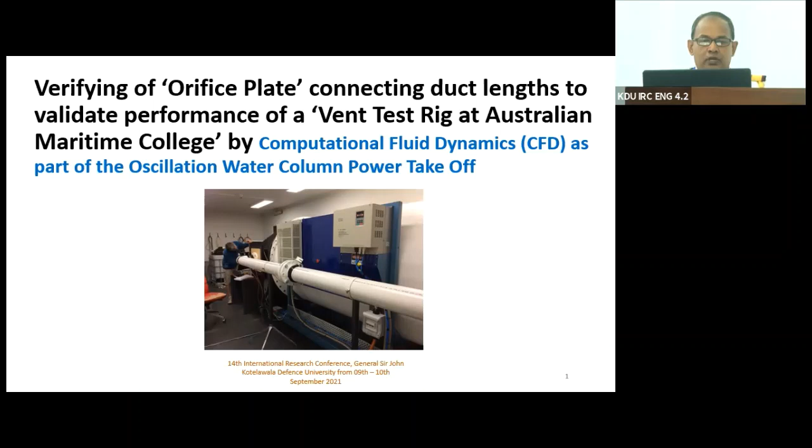Good morning, ladies and gentlemen. Today I am going to discuss verifying of orifice plate connecting duct lengths to validate performance of a vent test rig at Australian Maritime College by computational fluid dynamics, as part of oscillating water column power takeoff.

My outline is as follows: how oscillating water column ocean wave energy converter works, vent test rig, experimental recommendation, alternative method, geometry of pipe, generate a mesh and boundary condition, comparison of experimental results with computational fluid dynamic results, and conclusion.

Oscillating water column ocean wave energy converter consists of 2 major components. First part is chamber that absorbs energy from ocean waves and converts them into low pressure pneumatic power. Second element is turbine that runs by above developed pressure variation and drives a generator through a mechanical shaft and generates electricity. In this process, turbine is exposed to unidirectional airflow and utilizes a one-way valve to escape air from the chamber.

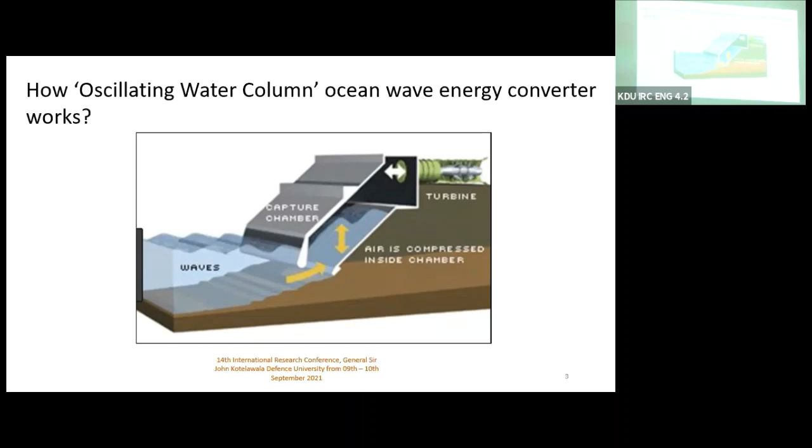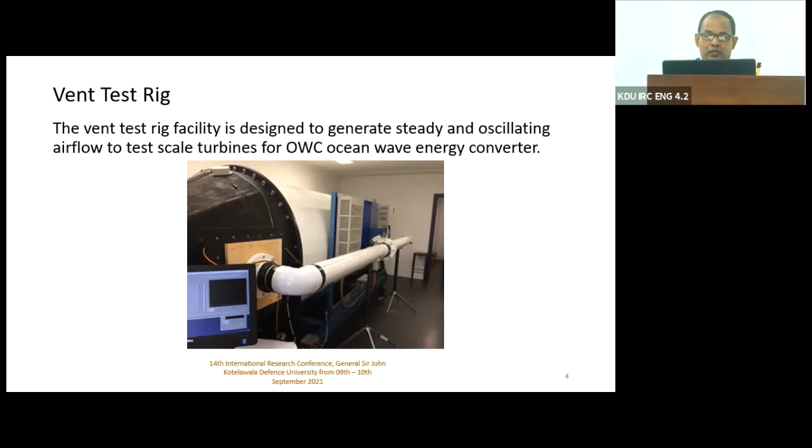Experimental recommendation. Expected outcomes could not be achieved by the experiments due to space restriction of the room.

Alternative method. Chose computational fluid dynamics application as alternative method to continue the investigation with economy of effort.

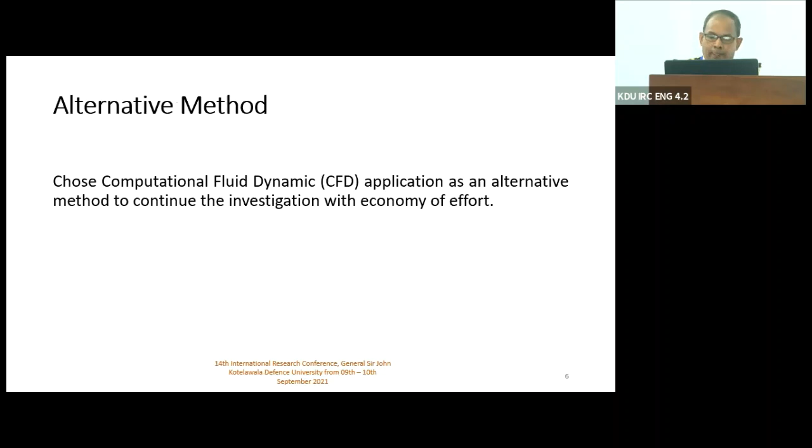My aim. The objective of this investigation was to apply CFD instead of vent test rig experiment and carry out modeling, then compare outcomes with experimental results.

Condition 1: CFD application was used to test differential pressure across the orifice plate with same upstream and downstream length of pipe that was utilized during the vent test rig experiment. In addition, CFD was applied again for the specified lengths of pipe with same orifice plate to measure the differential pressure across it - that is condition 2.

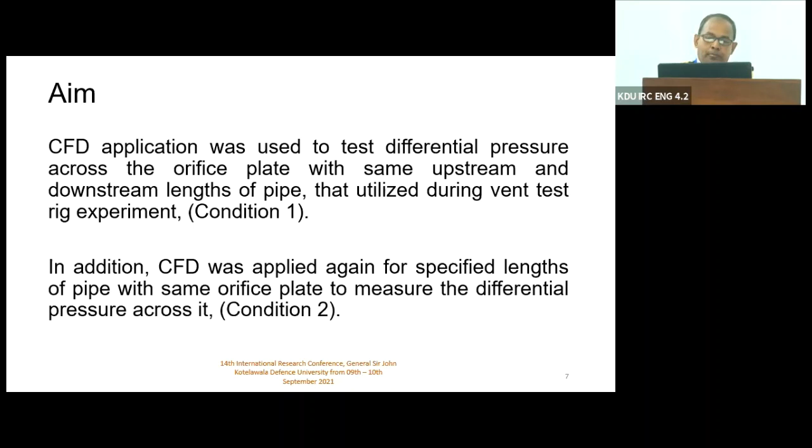This is the geometry of the short pipe. This is condition 1. The upstream and downstream pipe lengths were taken as 1675 mm and 1800 mm respectively.

This is the long pipe. This is condition 2. Upstream length increased up to 3000 millimeter and downstream pipe length kept as 1200 millimeter as per the standards.

The 3D geometry of two pipes and orifice was generated by Inventor software and exported into the ANSYS 19.1 workbench software. Subsequently, a fixed diameter orifice was made and selected XYZ coordinates correctly. Then develop upstream duct length up to 1.675 meter and downstream duct length with 1.8 meter as condition 1.

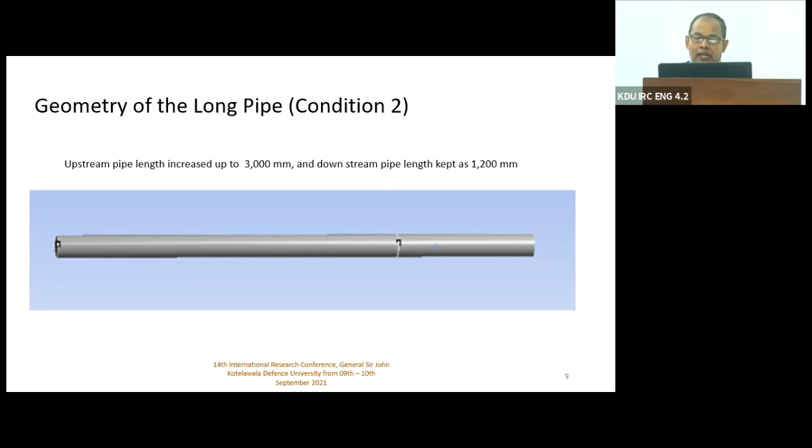Then simplify the geometry by introducing the inlet, outlet, walls, orifice inlet, orifice outlet to the ducts and orifice. Similarly, upstream duct length was extended up to 3 meter and downstream duct length was shortened to 1.2 meter as per the standards. Consider this as condition 2.

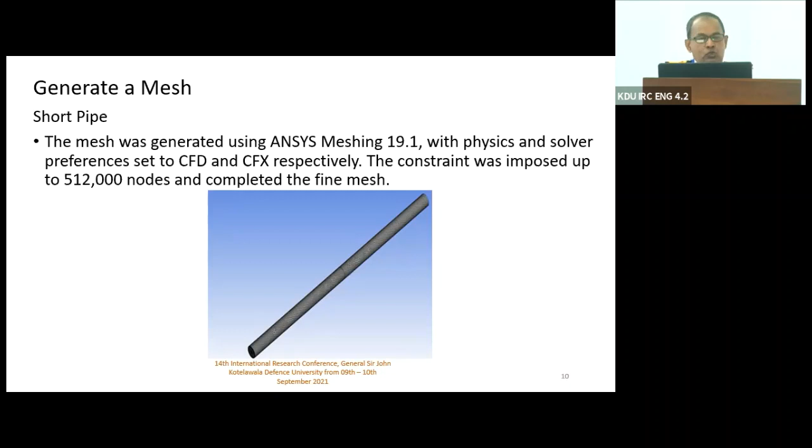Generate a mesh. Then after that we generate the mesh through ANSYS 19.1. This is the short pipe, and this is the long pipe. The process of meshing is time consuming and complex to generate an accurate mesh. The mesh is essential to be quality to give accurate answers. The movement of flow is bit complex in this application.

The mesh files were imported into CFX presolver and conduct the analytical study. Then define the properties of air and boundary conditions. Two monitoring points are established with 0.15 distance from the orifice plate inside the upstream of the pipe as per specified standards. Similarly, two more monitoring points were set up with 0.75 meter distance from the orifice plate inside the downstream of the pipe to obtain relevant measurements of the pressures.

The mass flow rate was calculated as per piston moving velocity and fed as input to the application to obtain the related pressure by monitor points.

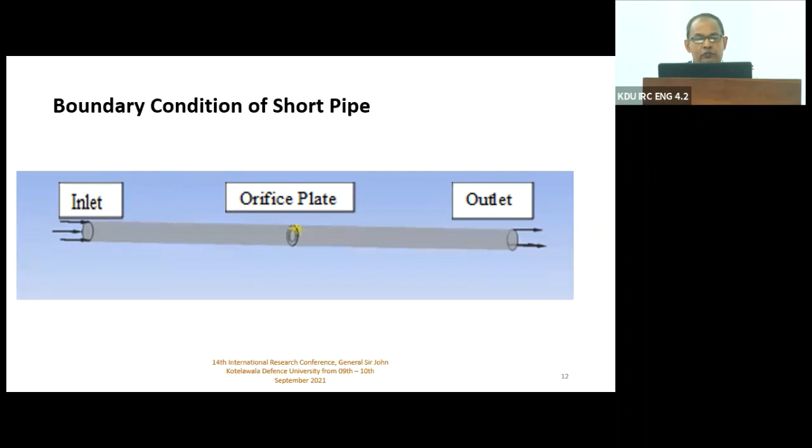This is the boundary condition of short pipe. You can see here inlet, orifice plate and outlet. Close to the orifice plate, there are 2 points - those are the monitoring points.

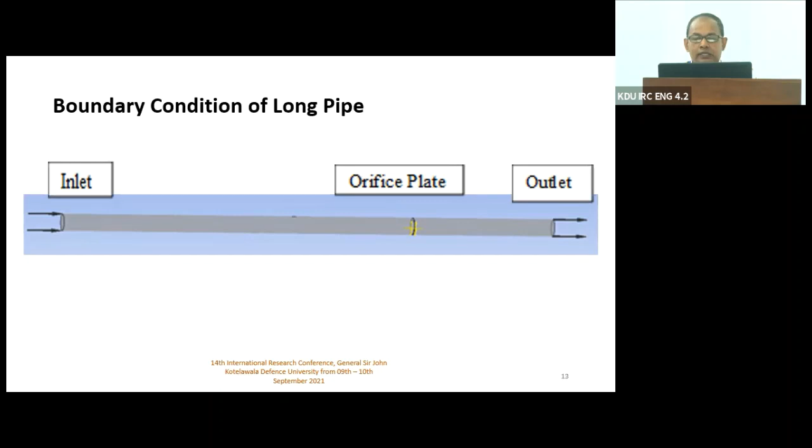Boundary condition of long pipe. The inlet and outlet domains were modeled with air in 3 different velocities. The inlet and outlet pressures were monitored through the monitoring points and carried out the simulation, then ensured to get the convergence in inlet pressure variations along with velocities.

This is called the convergence study of the short pipe. There is another name for this - that is the study to prove the boundary conditions of the generated mesh.

The inlet pressure converged with an estimated error of 0.0352, 0.21 and 0.175 for the coarse, medium and fine mesh respectively.

Grid convergence study, inlet pressure. This is the graph we obtained during the CFD modeling, for the short pipe.

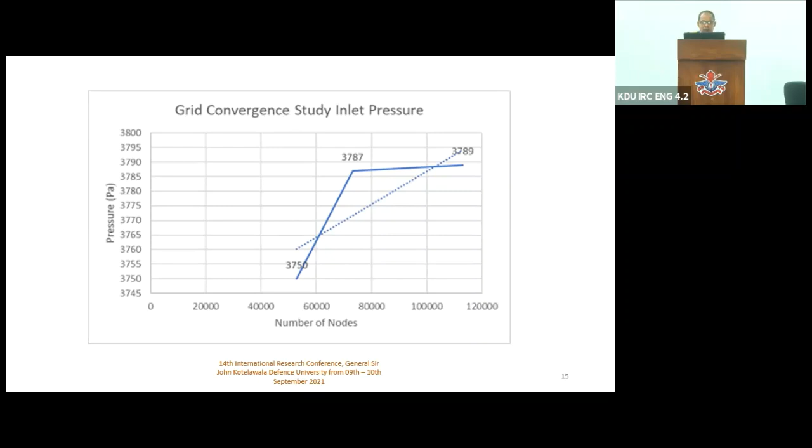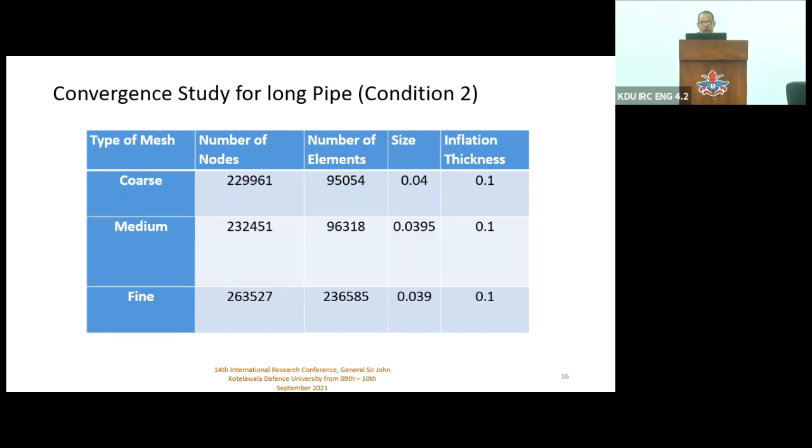Convergence study for the long pipe, condition 2. You can read this table in 5 columns, similar to the previous slide, showing types of mesh: coarse, medium and fine. The inlet pressure converged with an estimated error of 0.04, 0.0395 and 0.039 for the coarse, medium and fine mesh respectively at a velocity of 0.25 meter per second for a long pipe. It was revealed that the fine mesh provided the minimum error compared to the others. This is the grid convergence study, inlet pressure long pipe.

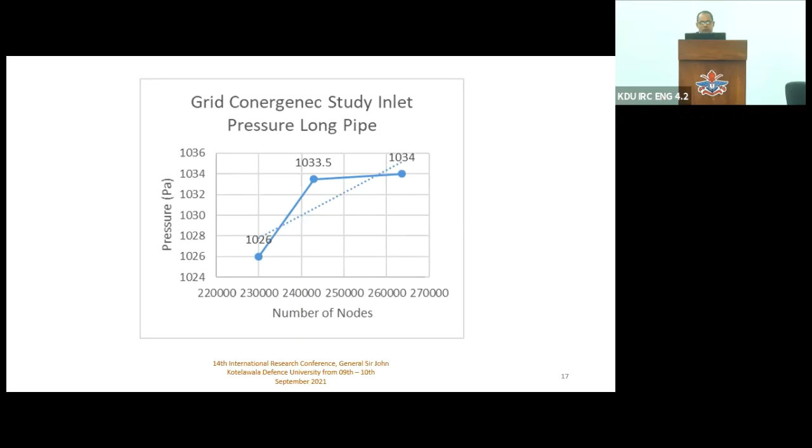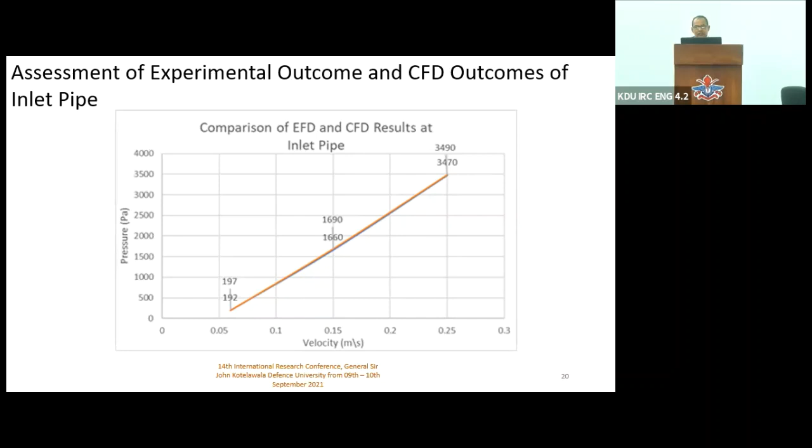This is the assessment of experimental outcome versus CFD outcomes of the inlet pipe, and there is no big variation. It is very minimal. That means the inlet pipe or the upstream pipe which we modeled through the CFD is correct.

This is the outlet pipe, assessment of experimental outcome and CFD outcomes of the outlet pipe. Here also the error is very minimal, meaning our model CFD pipe was correct. With that,

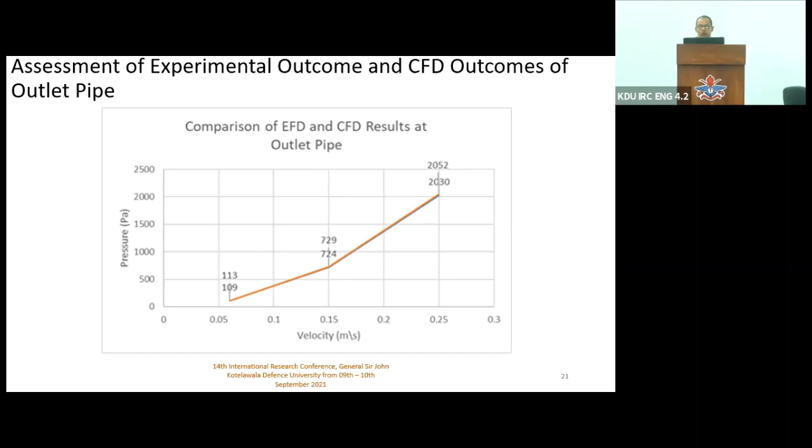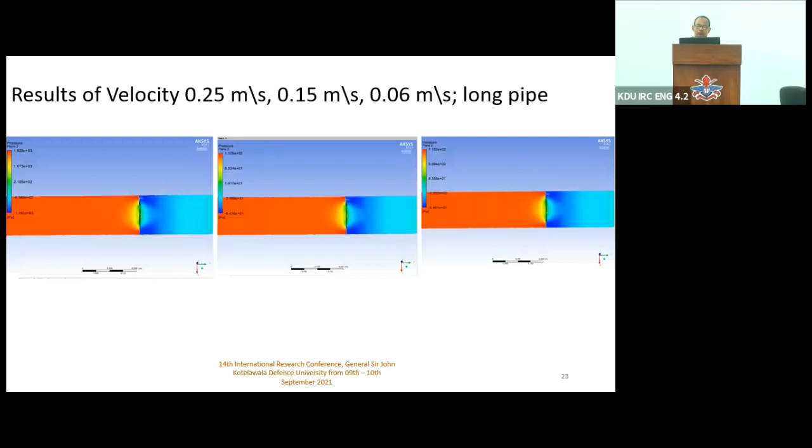These are the pressure planes outcome during our modeling. It was revealed that pressure development through the orifice plate was high when the upstream pipe was short, and a uniform flow outcome was shown due to the sufficient length of the downstream pipe. These are the results we obtained during the CFD simulation for the long pipe.

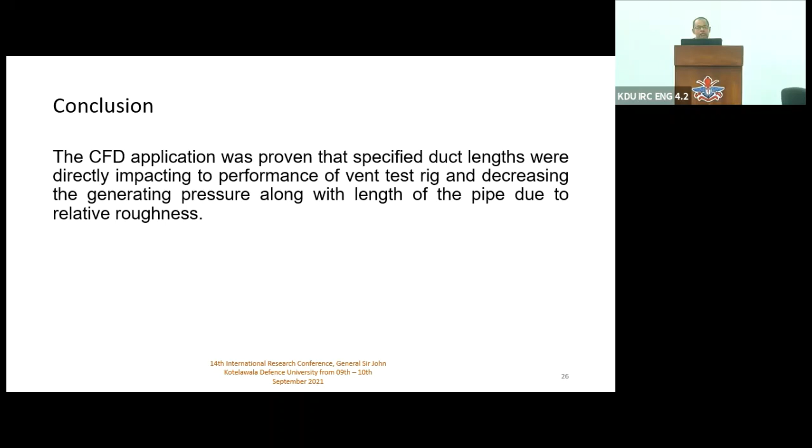Conclusion: the CFD application proved that specified duct lengths directly impact the performance of the vent test rig, decreasing the generated pressure along the length of the pipe due to relative roughness.

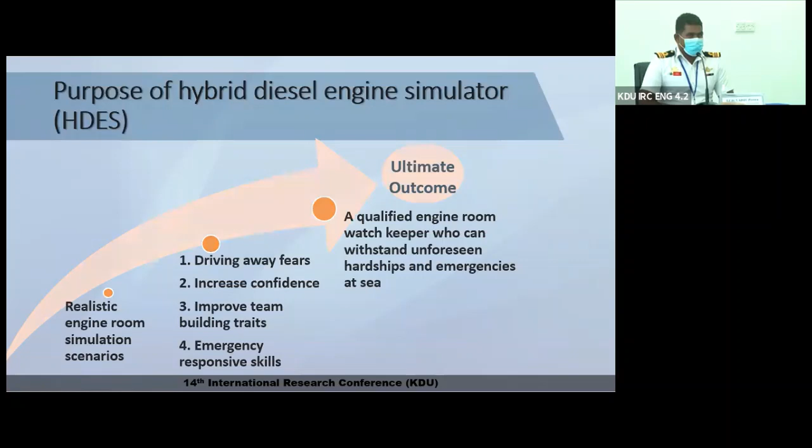Most engine room malfunctions occur due to operators' negligence, incompetency, or human errors. Therefore, the hybrid diesel engine simulator mainly pursues to become a perfect teaching method to train modern ship's crew by assessing the watchkeeper's behavior in emergency or crucial situations, enhancing practical knowledge on previously acquired theoretical aspects, improving problem solving ability, and components identification for replacement.

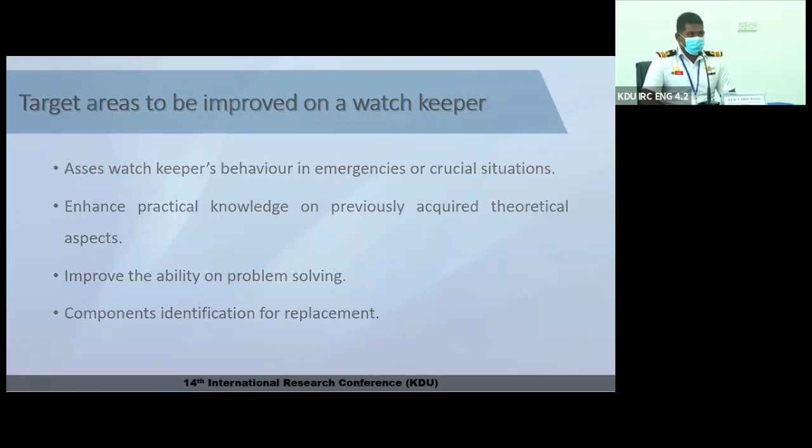Sensor inputs such as starting air pressure, freshwater temperature, lubricating oil pressure, seawater temperature, fuel pressure, and exhaust temperatures are obtained by the local sensors along with functional inputs from the machinery. The output function of the microcontroller will be in accordance with the algorithm provided for the functionality.

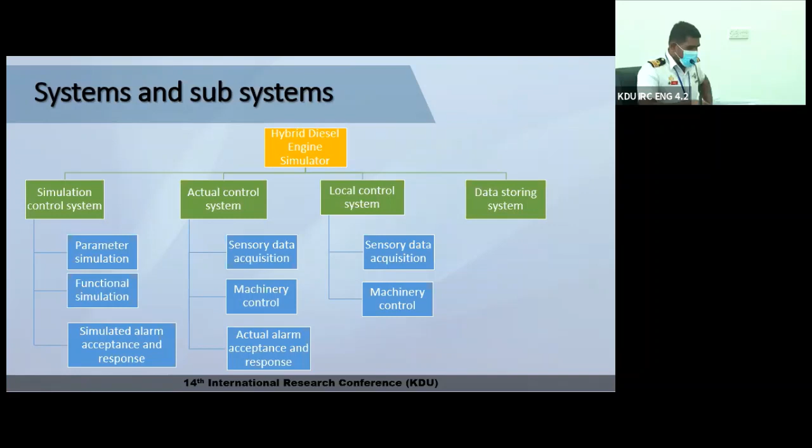All records of the training are stored in a separate memory location within the system, and authorized personnel with a password have accessibility. Now we will look into the system specifications.

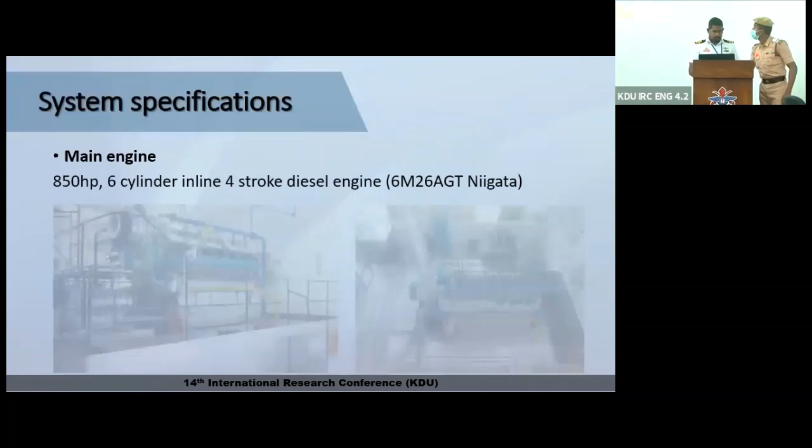The facility comprises a 6-cylinder main engine which can provide 850 horsepower. Separate consoles are available for instructor and trainees to control and accept simulated alarms. The instructor's console is enabled to interchange the entire system into 2 modes, namely simulation and actual. All simulated activities are done in simulation mode.

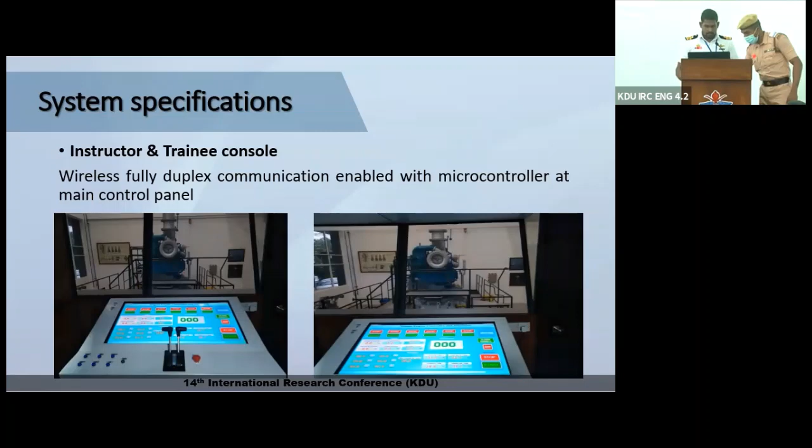These consoles are enabled with fully duplex wireless communication with the microcontroller at the main control panel. The local control panel comprises the microcontroller and raw inputs from the local sensors.

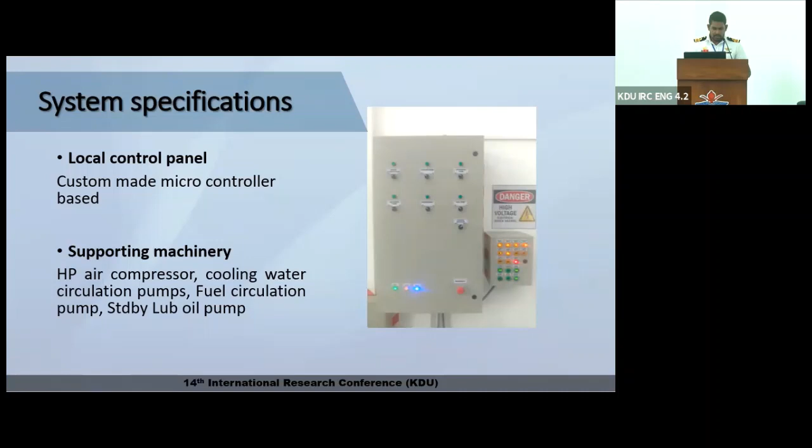Apart from these components, the facility comprises a high-pressure air compressor which can produce 30 bar, a fuel transfer pump, cooling pumps, standby lube oil pumps, freshwater and lubricating oil coolers, and a fuel oil tank - components common to any onboard engine room.

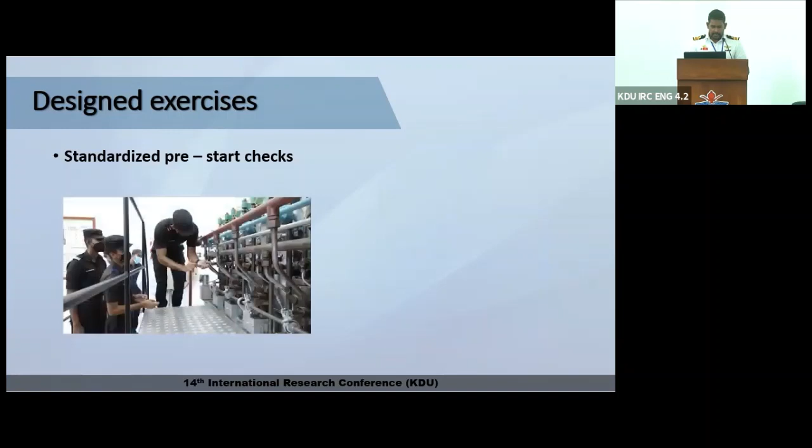With the outset of developing competence and skills of trainees, activities related to functioning of a main engine were developed. Such activities include standard pre-start checks carried out before starting the main engine, such as oil level of rocker lube oil, turbo oil, engine lube oil, fuel oil, cooling water level of expansion tanks, opening of system valves, visual inspection of the engine and hand turning of the main engine.

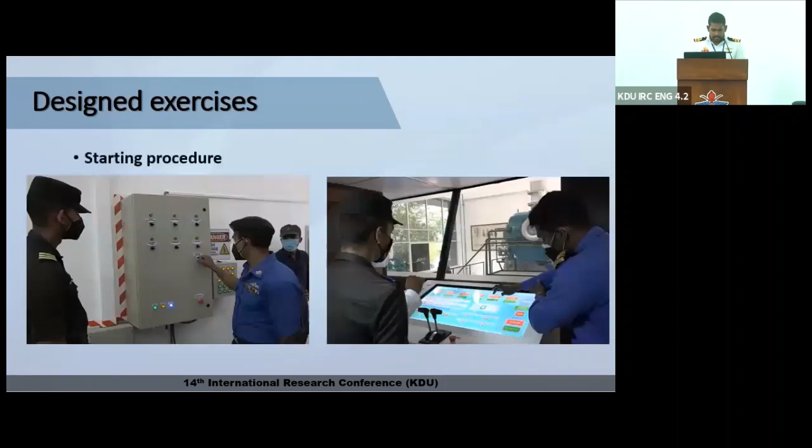And sequence of actions to be carried out in starting the engine, such as confirmation of interlocks, confirmation of starting conditions such as reaching adequate starting air pressure, lubricating oil pressure, and fuel oil pressure, etc.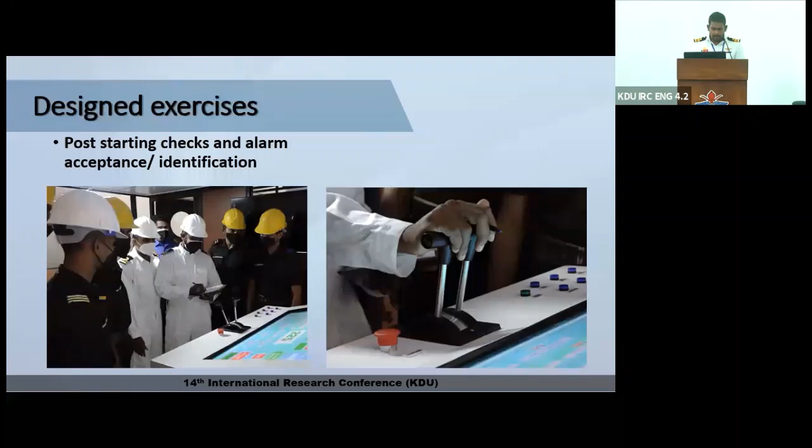Recording the data, acceptance of alarms and situation identification, such as monitoring of engine behavior, abnormal parameters, noises, excessive vibration, and identifying machinery malfunctions, and the stopping procedure, post-operation inspections and shutting down, such as interchanging of controls between remote and local, unloading of engines, and so on.

As an example simulation, we considered the activity of identifying exhaust temperature rising in the engine within the simulated environment. The objective of this activity is to make the trainee observe the abnormal temperature rising in selected cylinders through the recorded parameters and other supporting parameters.

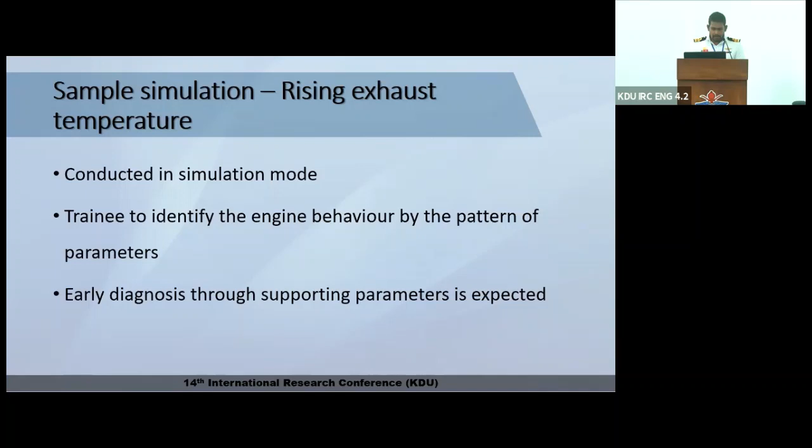During this experiment, students recorded the subsequent parameters together with cylinder exhaust temperatures. Since the engine was in simulation mode, the rest of the parameter readings were obtained as simulated values for respective RPMs. Such values were generated compared to possible temperatures in an actual scenario.

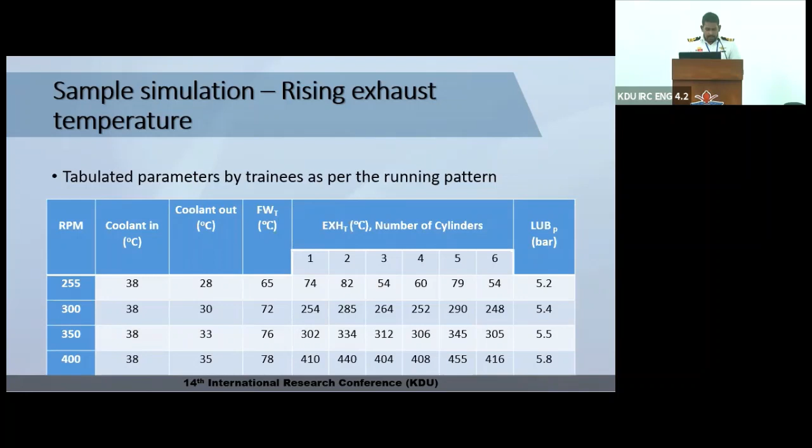Accordingly, obtained temperatures were tabulated in a graph as depicted in the slide, and variation of temperatures was the key consideration for the trainees' discussion.

So with this result, the trainee should be able to identify the abnormality of exhaust temperature ranges in number 2 and number 5 cylinders and identify the root cause which will lead to such occasions.

Further, it is discussed about the supporting factors to confirm the root cause, such as observation of black smoke, low charge air pressure, and so on, which are some of the observations pertaining to the given root cause in the slide.

Thereon, the discussion further extends to carry out possible actions in a down-to-top approach, whereas carrying out remedial actions from the most possible action to the least possible action.

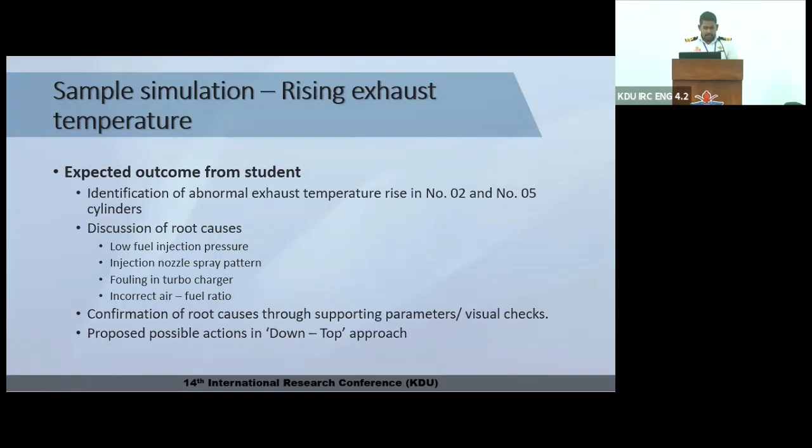As a conclusion, this simulation facility is equipped with 2 workstations for individual training and control of the watchkeepers at the same time. Therefore, enlightening marine engineers by means of a hybrid marine engine room simulator is the least expensive and safest training and evaluative method in the present day context.

So this is the end of my presentation, and thank you very much.

Our next presentation is on the design approach to optimize waterjet performance, a case study: Coastal Craft Sri Lanka Navy. This is jointly authored, and the presenting author is Commander D.S. Bogahawatte.

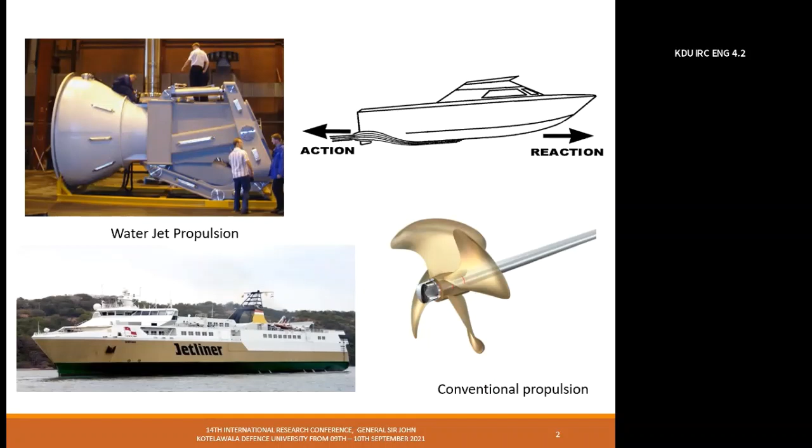If you remember the ship jetliner, the above figure depicts its waterjet model. The waterjet sucks water and throws it from the stern, and as a result the hull moves. You might be familiar with traditional propellers, but our study is based on waterjets.

The marine propulsion system usually consists of a marine engine, gearbox as optional, propulsor, and hull. The hull and propulsor studies deal with thrust, while propulsion engine studies deal with power. So the naval architect's key task is to ensure power transmission, power output, RPM, and finally to pitch the propeller to ensure optimum performance of the system at the equilibrium condition.

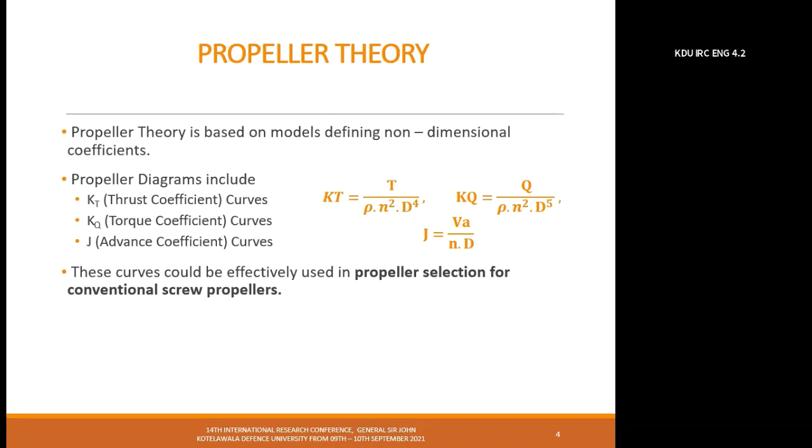So we need to first study propeller theory. These are based on models defining non-dimensional coefficients, which are the pathway from a model to an actual ship. The thrust coefficient, torque coefficient, and advance coefficient are being used for propeller selection in conventional screw propellers. All three combine thrust, torque, advance velocity, diameter, and RPM.

These are typical plots, and this methodology offers two benefits: first, working with factors rather than broad 3D geometry, and second, being simple to calculate yet all-inclusive for performance studies. Thus, this numerically simple task leads to successful selection of optimum propeller parameters such as RPM, diameter, pitch, and so forth.

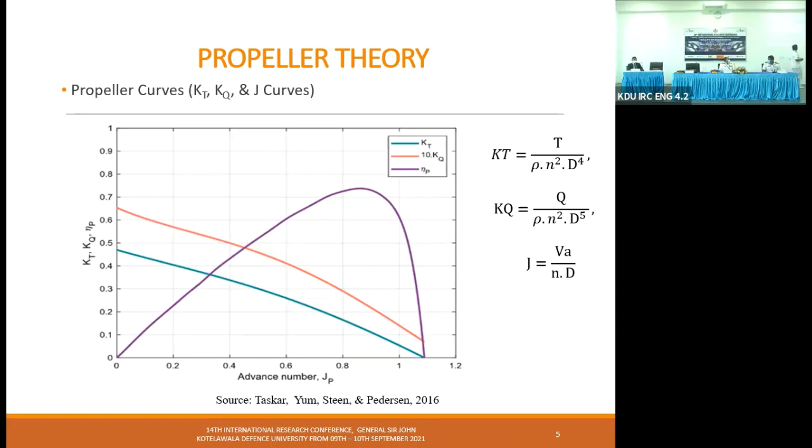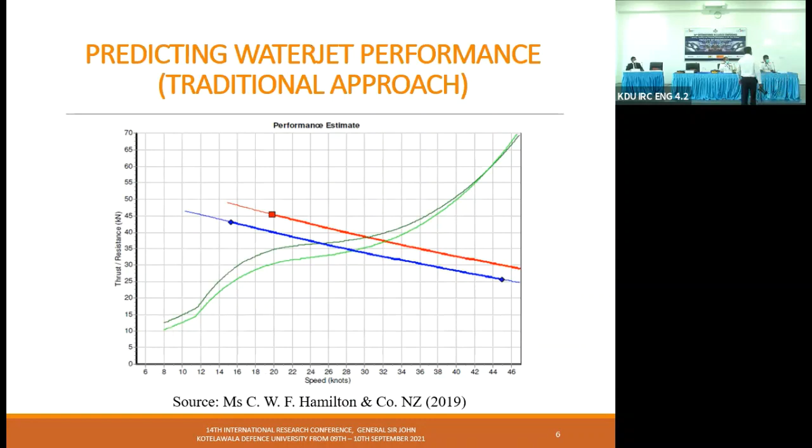Earlier plots are for open water propellers, but our study is for waterjets. This is the figure we received from the waterjet manufacturer. The green curves are the hull resistance, and the blue and red curve plots are power delivered by the engine, typically at 85% and 100% RPM.

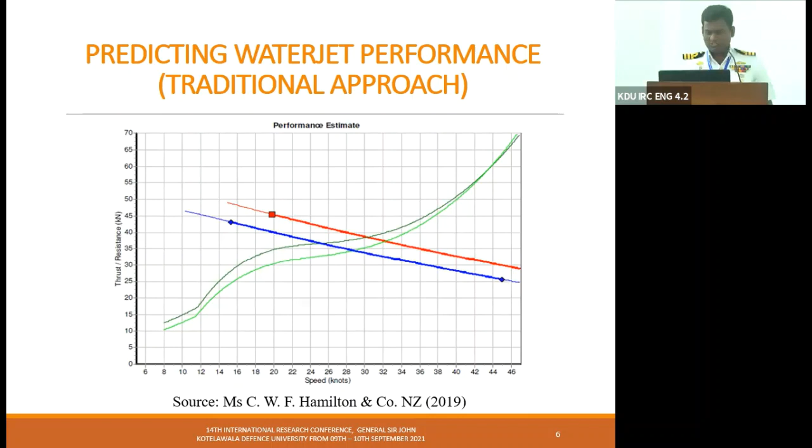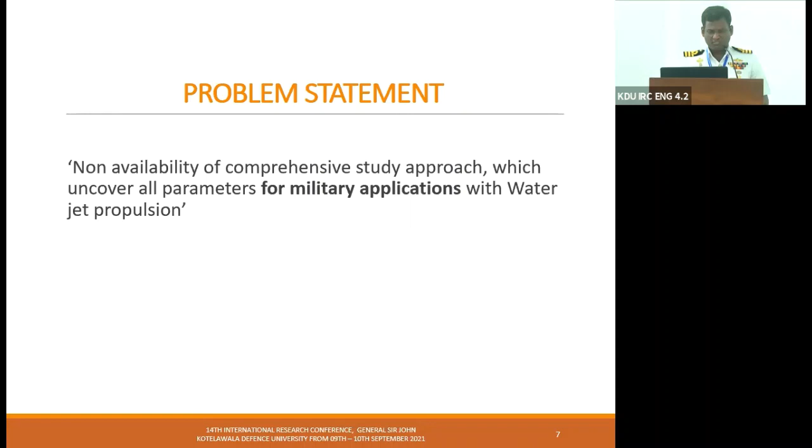This approach by the manufacturer hides the RPM-power relationship and does not allow computation and analysis of fuel economy, or boat acceleration reserve for maneuverability and comeback, which is very critical in naval applications. So the non-availability of a comprehensive study approach uncovering all parameters for military applications with waterjet propulsion was the problem statement.

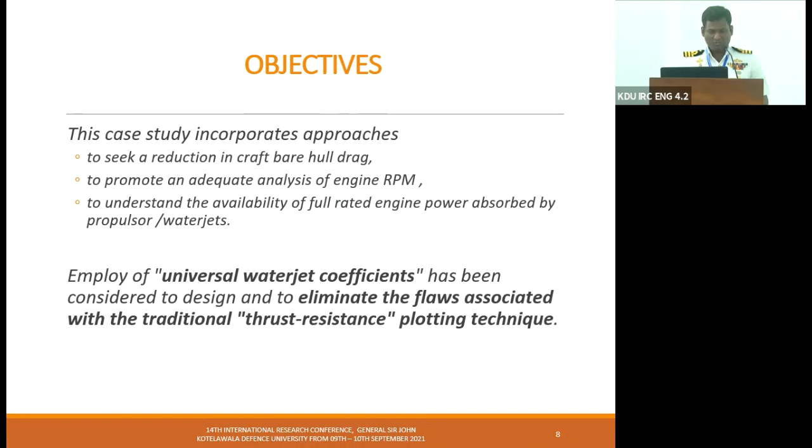Moving into the objectives: to seek reduction in craft bare hull drag, to promote an adequate analysis of engine RPM, and to understand the availability of full rated engine power absorbed by the waterjet. Thereby, employment of a universal waterjet coefficient has been considered to design and eliminate the flaws associated with the traditional thrust-resistance plotting technique. So a naval project designed by the authors was used to demonstrate how they averted possible complications and optimized the design through a new calculation methodology.

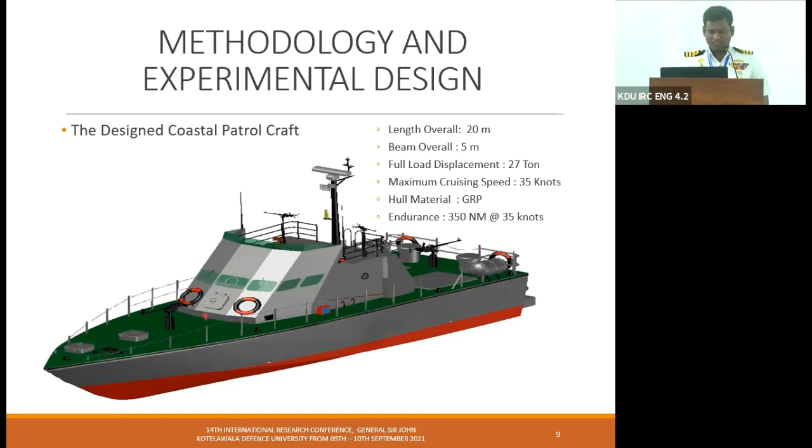So this is our project: 20 meter length, 5 meter breadth, 27 tons of weight, going at 35 knots, made out of GRP material. Waterjet selection follows certain criteria: power to weight ratio, boat speed, transom detail of the hull, GRP as the hull material, and robustness for naval application, coming from the operations departments. On top of that, we studied technical requirements and waterjet specifications including nozzle, impeller, physical characteristics, ratings, and impeller thrust curves, all combined in our studies.

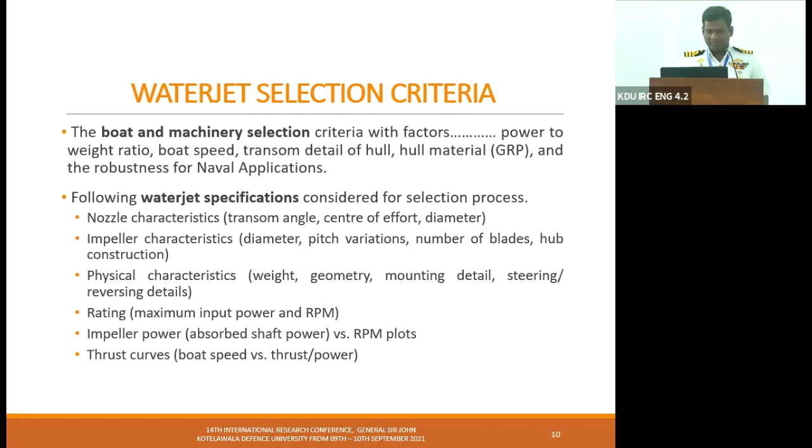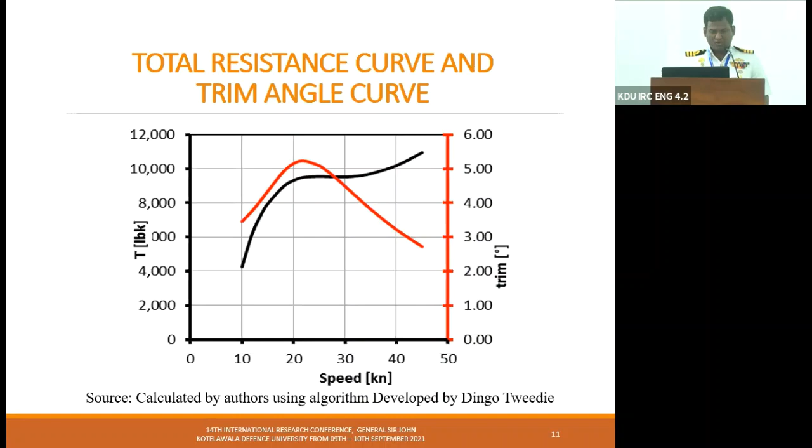For naval applications with extreme maneuvers as the primary design objective, it is required to operate the boat above this transition region. This analysis revealed that improvement of boat parameters is a necessity, since the manufacturer's approach did not allow visibility of acceleration reserve and operational efficiency.

Length, beam, and depth were fixed for this project for the operation department requirement, but we were interested to see how the parameters change with respect to longitudinal center of buoyancy, gravity, and flotation. Also transom immersion on the hull drag. So with all these studies, the first objective of seeking reduction in craft bare hull drag was achieved.

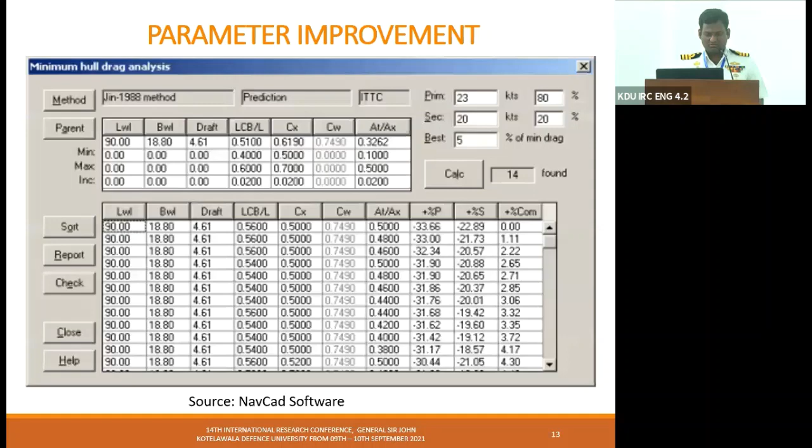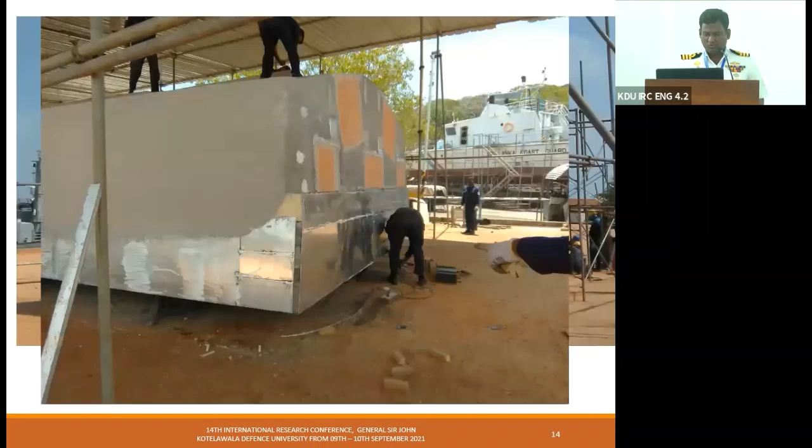This is the plug development. We incorporate all these things into the plug development. Then moving into the next two objectives of our studies with the universal waterjet coefficient.

One coefficient is the power coefficient, the other is the thrust coefficient. This is how it has been derived in simple terms. Then moving into our studies, the earlier depicted conventional thrust curves, which are generally given by the manufacturers, were collapsed by authors into two coefficients called CP and CT.

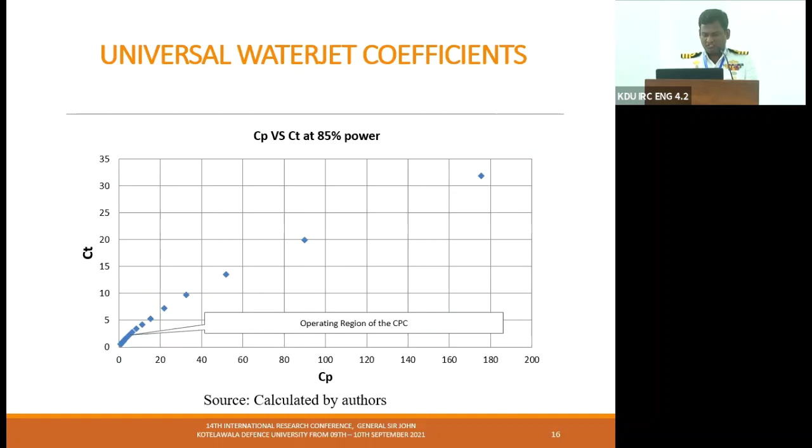As placed in this figure, since the operating region of the coastal patrol craft, which goes at 35 knots, lies in the region of small values, waterjet selection could be justified for high-speed operation.

Then one research outcome with employing universal waterjet coefficient was the ability to identify operational location of maximum jet efficiency, which was 56% for our case. For current available naval boats, what we have, this figure is between 52 to 55%.

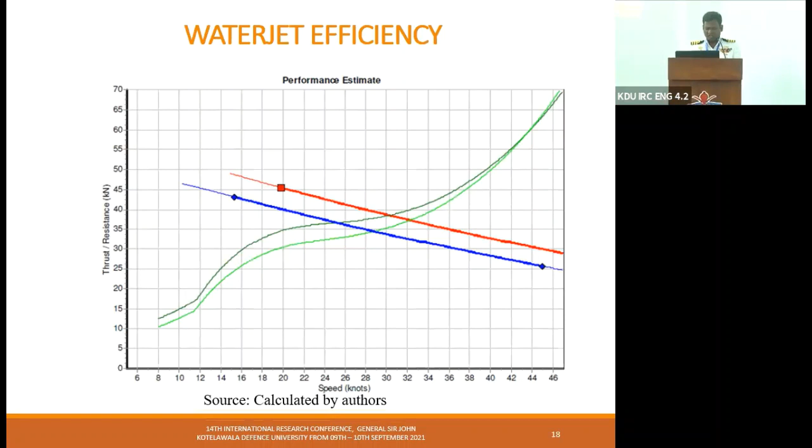So these are the traditional curves that we received, but now it is probable to select the best performing waterjet with greatest efficiency. So we redefine the curves with efficiency coming into the play. The author's design is closer to maximum possible waterjet efficiency.

That selected waterjet is at peak efficiency at high speed, which was the requirement. These curves also indicated that a speed of 35 knots would be the ideal operating point for this craft.

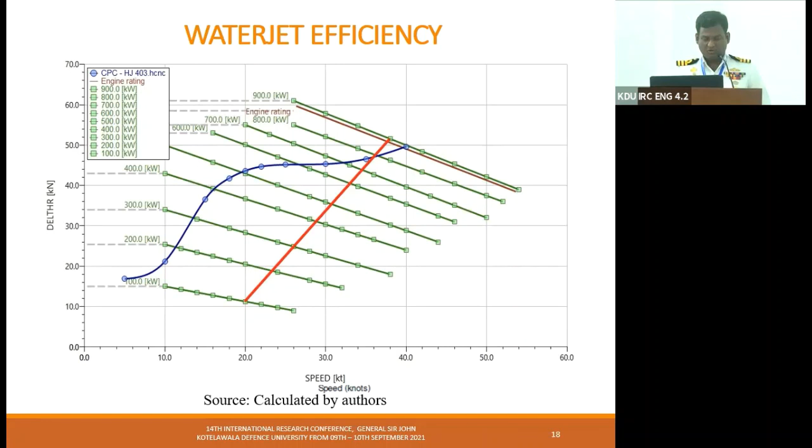This information is very critical since this is a military patrol boat, as the time to reach its maximum speed is of vital importance. Because we didn't understand this concept, during the humanitarian operation period, we lost many boats. Hence, this approach of assessing waterjet performance using the universal waterjet coefficient is justified.

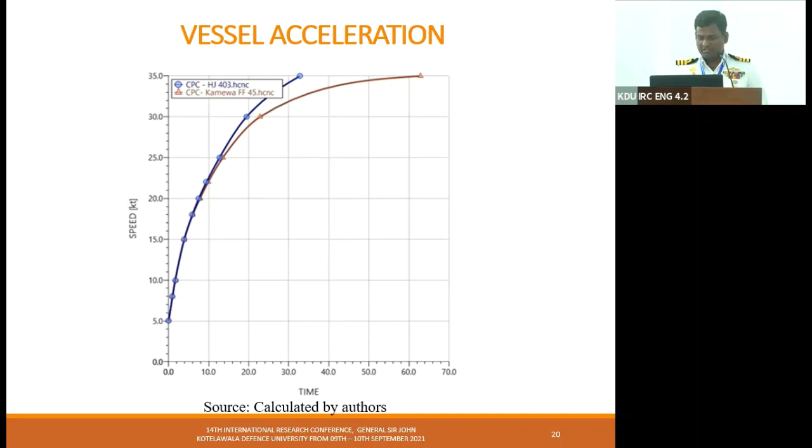Jane's Navy International magazine also featured and understood the boats built by us. During my six-year tenure at the boat building yard, we started exporting boats to Nigeria and Seychelles, and we earned a lot of foreign exchange for this country.

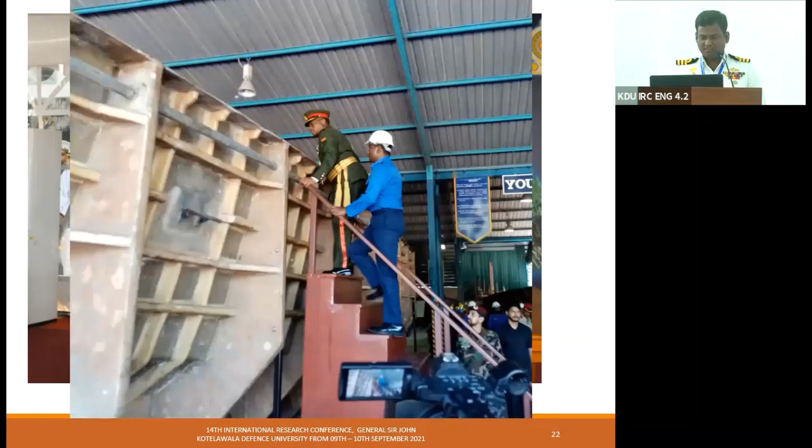As a conclusion, even though most waterjets look suitable for a particular application, waterjets are usually optimized by the manufacturer for a separate application. The appropriate selection is the duty of the boat building yard naval architect.

The actual naval patrol craft design engineering example discussed at this juncture demonstrates why naval architects shall have dependable techniques to assess waterjet performance. Traditional methods are beneficial to ensure a particular waterjet will meet some performance requirement, yet this approach is usually inadequate for many critical assessments of waterjet performance on efficiency, acceleration, entire RPM envelope operation, and so forth.

So the authors exhibit how to employ universal waterjet coefficient as a methodology, which guides and points the way to accurate propulsor choice. The outcome is authors found the correct matching point, or in simple terms, hull, propulsor, and engine matching was done. These are the few references, and the acknowledgement goes to the Sri Lanka Navy for allowing us to do this project. Thank you very much.

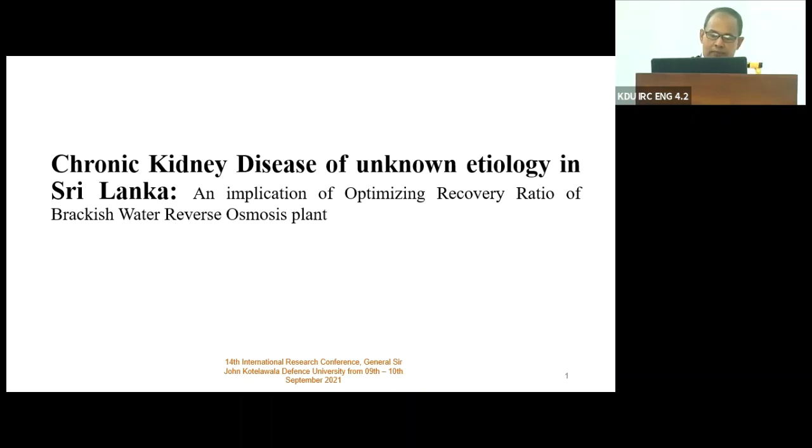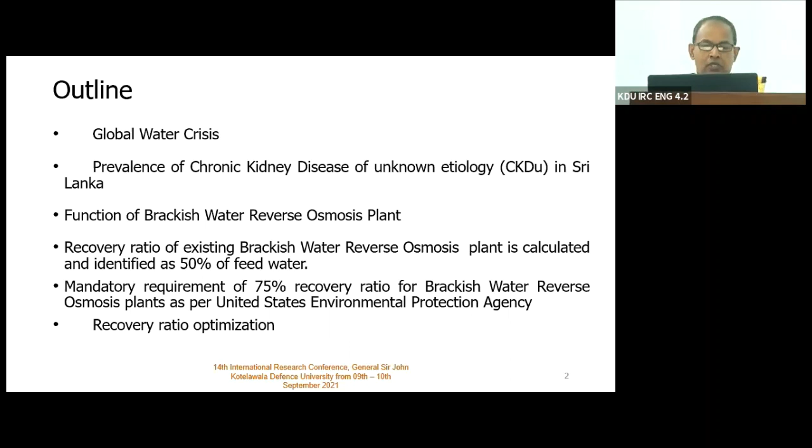My outline is as follows: global water crisis, prevalence of chronic kidney disease of unknown etiology in Sri Lanka, function of brackish water reverse osmosis plant, recovery ratio of existing brackish water reverse osmosis plant is calculated and identified as 50% of feed water, mandatory requirement of 75% recovery ratio of brackish water reverse osmosis plants as per United States Environmental Protection Agency, and recovery ratio optimization.

Global water crisis: 785 million people lack access to safe drinking water, that is 1 in 10 people on the planet. Women and girls spend an estimated 200 million hours carrying water every day.

What is chronic kidney disease of unknown etiology? There are two types of this disease. Chronic kidney disease, or CKD, is a long-term condition where the kidneys don't work as well as they should. It's a common condition often associated with getting older. Chronic kidney disease of unknown etiology is a complex form of the disease that disables kidney function, and its significant root cause has not yet been recognized.

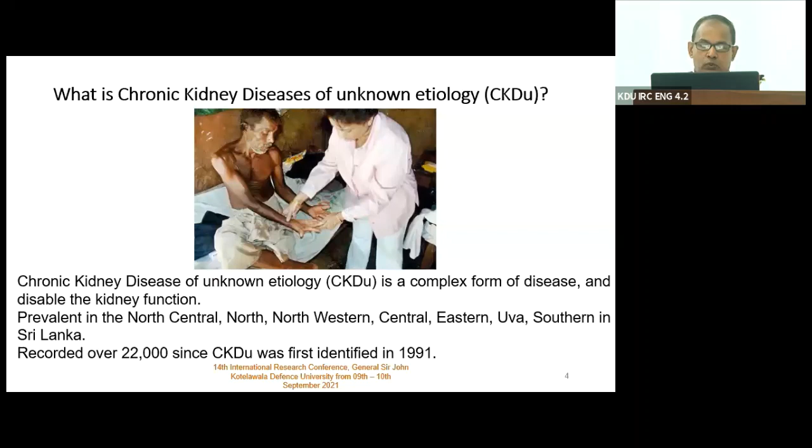However, it is believed that changes in certain drinking water quality parameters, due to contamination of water sources by agricultural activities, can be one of the roots for CKDU. Therefore, the government of Sri Lanka realized the importance of supplying safe drinking water as an appropriate method to curtail the spread of CKDU in the country.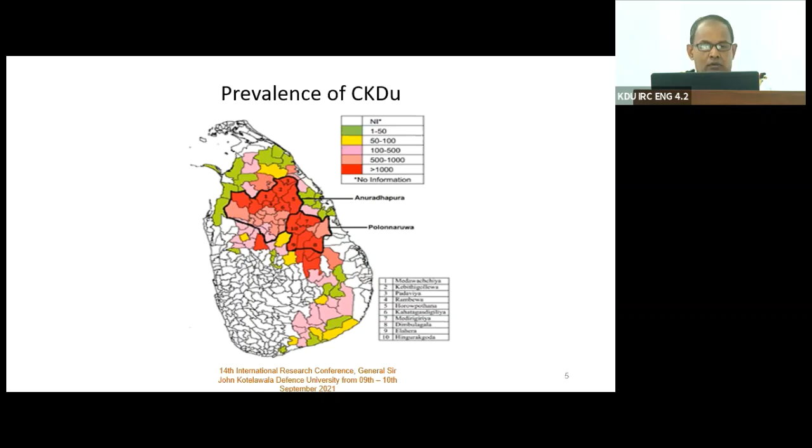Function of brackish water reverse osmosis plant. Before designing a plant for one particular location, we have to check the water source and test water samples from the Sri Lanka Water Board or Industrial Technology Institute, starting from the raw water.

Once the raw water comes into the feed water tank, we normally install a 5,000 liter tank. Then we can pressurize it through the feed water pump. The feed water pump is normally a centrifugal pump, which can pressurize up to 3 to 4 bar. Then pressurized water goes to the multimedia filter.

The multimedia filter is comprised of one sand filter and one carbon filter. Then pre-treated water goes to the cartridge filter. Cartridge filter always depends on local market availability - sometimes we install a 20 micron filter, sometimes we prefer a 10 micron filter, depending on market availability.

Then pre-treated water goes to the high pressure pump. The high pressure pump is the heart of this application. In the Sri Lankan context, we use a centrifugal high pressure pump due to economy of effort. If we move to the global context, they prefer to install a positive displacement pump due to durability. This pump pressurizes the water up to 15 bar.

I want to emphasize one more fact: Sri Lankan feed water is a bit better than what is available in other regions of the globe. Then the pressurized water goes to the RO membrane, which purifies the water. Then product water goes to the product water tank, that is a 1,000 liter shell tank. Then concentrated water, or the reject water, goes to the atmosphere.

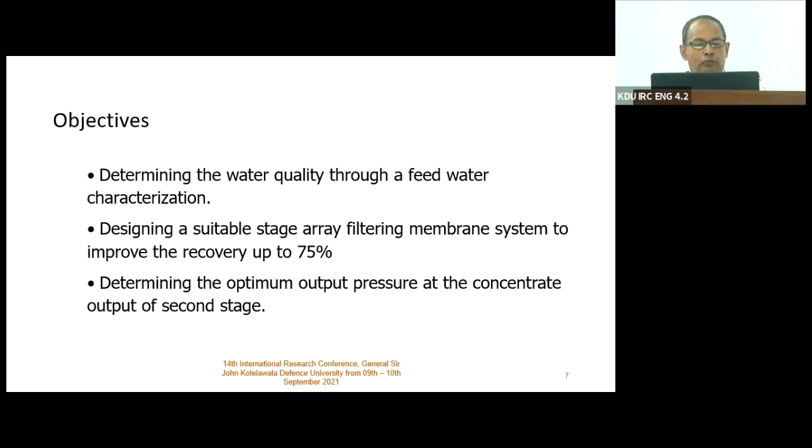My objectives: determining the water quality through feed water characterization, designing a suitable stage array filtering membrane system to improve the recovery ratio up to 75%, and determining the optimum output pressure at the concentrate output of the second stage.

My methodology: selecting implementation area, feed water characterization, membrane arrangement design, analysis specification of high pressure pump, standardizing concentrate pressure for maximum recovery, and implementation.

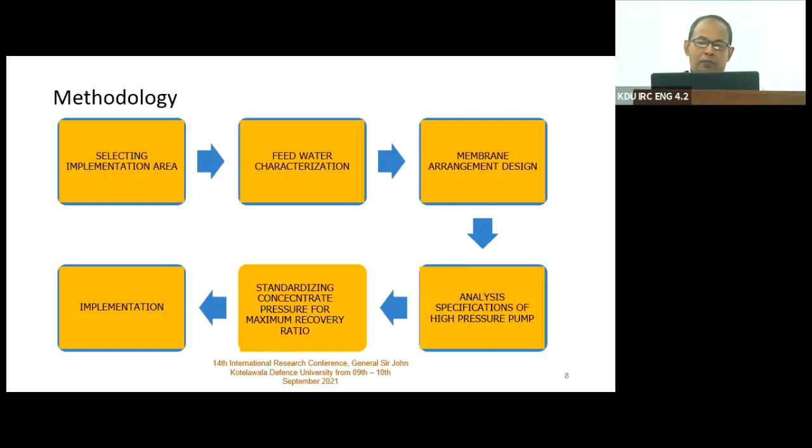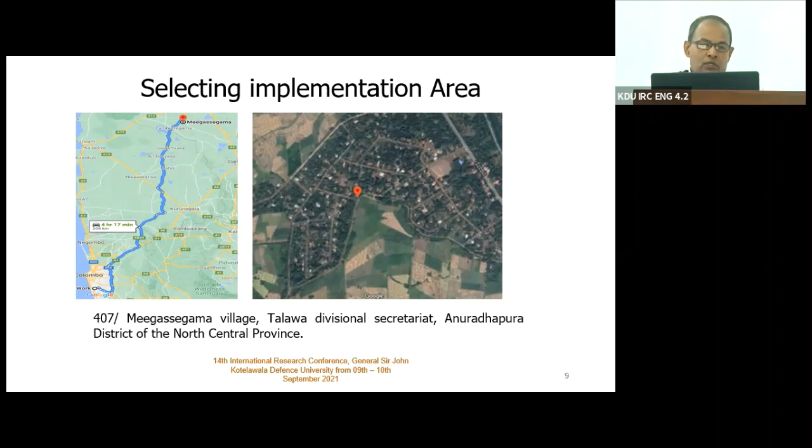Selecting implementation area: MS Rashi Water facilitated us to carry out research with their BWRO plant at number 407, Meegassegama village, Talawa Divisional Secretariat, Anuradhapura district, North Central province. While selecting this village, I considered the number of CKDu patients, which was 745, the number of beneficial families from this existing RO plant, which is 550 families, and the feed water source. This place is a bit far from Colombo, 205 kilometers away.

Then you can say, what is the requirement of doing RO for this particular location? You are right.

I want to emphasize one thing. If magnesium is available in your drinking water, what happens? You will be having a bitter taste. Because of that, we decided to incorporate improvements with this existing plant.

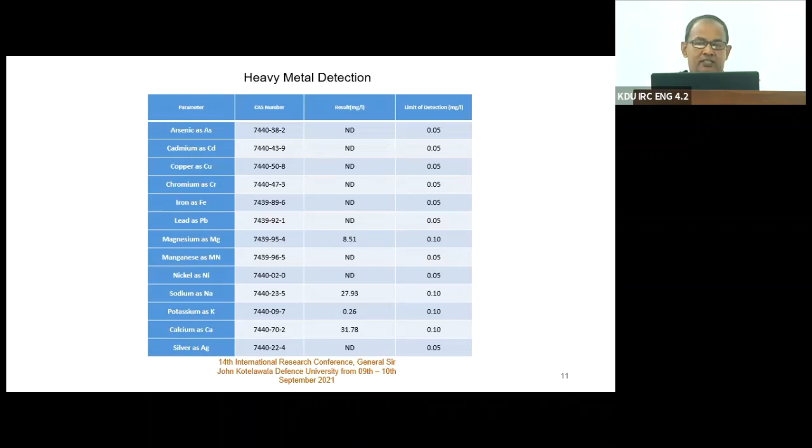According to the theoretical aspects, there are 2 types of membrane arrangement: one is parallel, the other is serial. Here you can see just after the high pressure pump, you can fix the membrane parallelly and take out the permeate or product water.

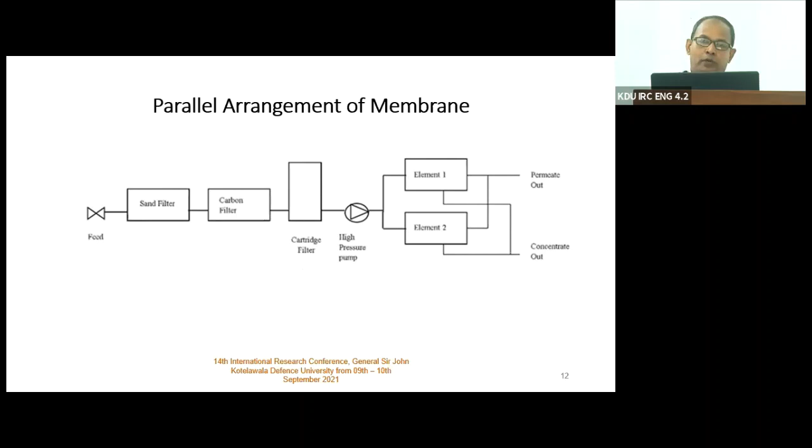In the serial arrangement, just after the high pressure pump, element 1, that is membrane 1, fix the second element serially. There is a specialty in this: the output of element 1 will be the input of element 2.

Pressure vessel arrangement before the stage array of this existing plant: we studied the plant that was a 5,000 liters per day plant capacity with a single membrane. Then we studied the specification of the high pressure pump. It was a centrifugal pump, single phase, and could be pressurized up to 15 bar.

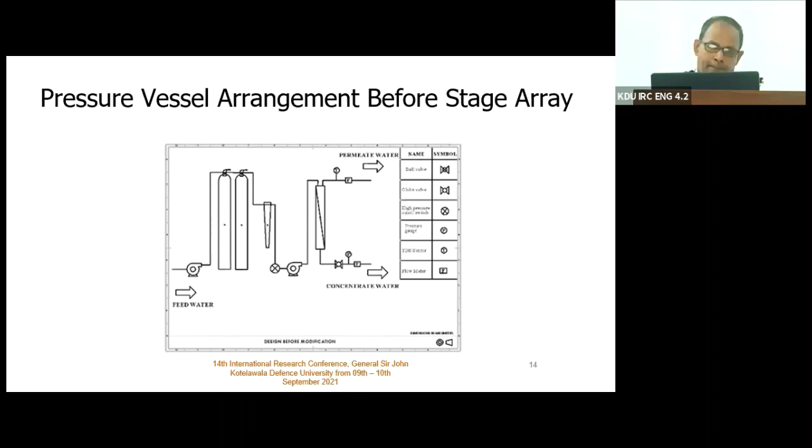Then I asked my students to practically work with this application and install the second membrane to the first one in serial method. But we couldn't get the product water out.

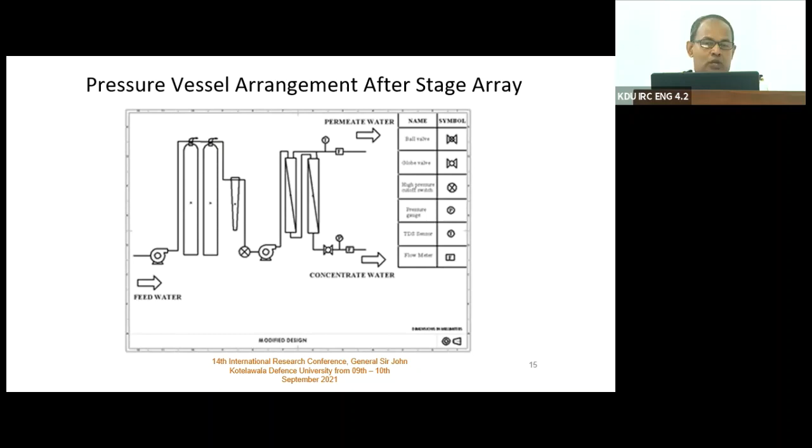Then we did a modification: tap in the feed water, get the feed water out, and incorporate it with the element 2 input. There is a globe valve close to the concentrated water side, and we regulate the valve and were able to get the product water or the permeate from the permeate output.

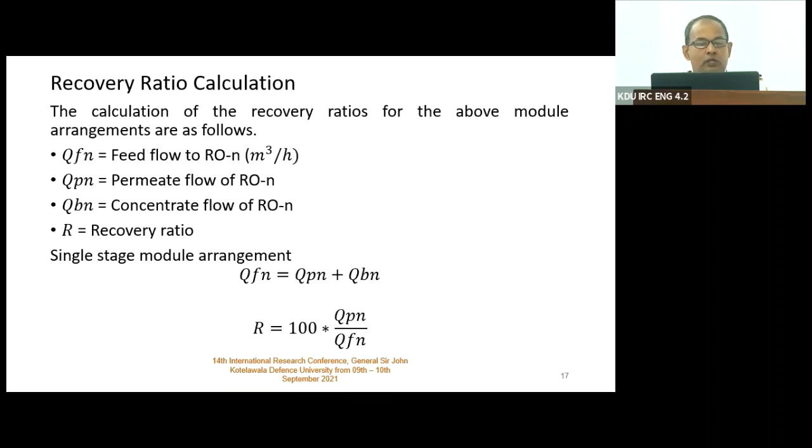Recovery ratio calculation: QFN is feed flow, QPN is permeate flow, QBN is concentrate flow. R is recovery ratio. R equals 100 times QPN upon QFN.

My results: we consider 1 minute and obtain the feed water volume, that is 25.26 liters. Before modification, concentrate volume was 12.9 liters, permeate volume 12.36 liters, so recovery ratio was 48.9%.

After modification, concentrate volume came down to 6.21 liters, permeate volume 19.05 liters. Then recovery ratio enhanced up to 75.4%.

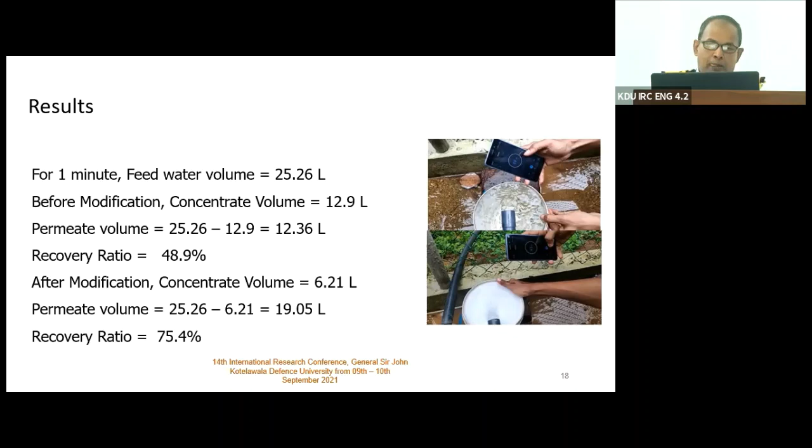Conclusion: huge benefit to the village of Megaskama by increasing the recovery ratio, reducing the cost per liter of water, and reducing feed water wastage. The feed water saving would be most affected during times of drought, where water is scarce and feed water sources are drying up. My recommendation: if we can incorporate this improvement to the Sri Lanka Navy plants, there are 900 plants available all around the country.

We can save 1,125 tons annually.

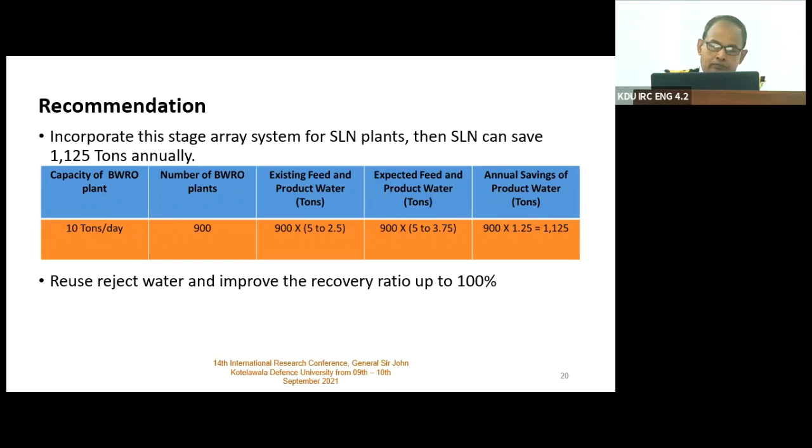My research focus has been since 2015. Before 2015, Sri Lanka bought a number of plants from India and Israel. The cost was 4.8 million rupees, recovery ratio was 50%, and it was an energy intense process.

In 2015, I developed a reverse osmosis plant here that cost 1 million rupees, still with a recovery ratio of 50%, energy intense. Then in 2019, I developed an air operated domestic reverse osmosis plant. My patent number is 21486.

In 2020, I again strengthened the pre-treatment system in the reverse osmosis plant. My patent number is 21731. Today, I achieved something from my project and improved the recovery ratio up to 75%.

I saved 3,600 million rupees for the country.

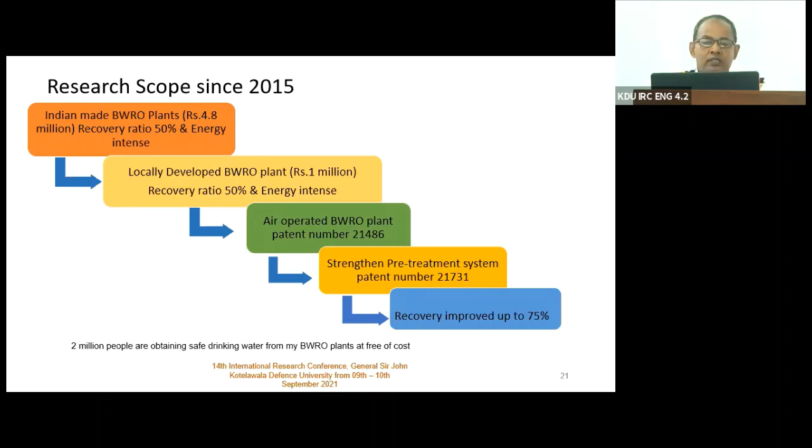Thank you very much, Commodore Dissanayake, an excellent presentation of the good work that you have done over the last several years. A good improvement to the reverse osmosis plant to get a better yield, as well as to give a benefit to the dry zone of Sri Lanka. Thank you very much for your presentation.

And that concludes the 4 presentations in the first session. Now we are behind time, and actually we have only about 10 minutes for discussion, but let us put it for 15 minutes discussion time. Are there any questions in the chat box? Can you display the questions? Is it possible to display the questions?

Excuse me, may I ask a question? I'm Lieutenant Commander Harshan Aratna, sir. I have a question to Commodore MCP Dissanayake regarding presentation 1. Since CFD is an interesting subject area, can't we make this popular among all our students? And second, can't we use this oscillating water column ocean wave energy converter in Sri Lanka, sir?